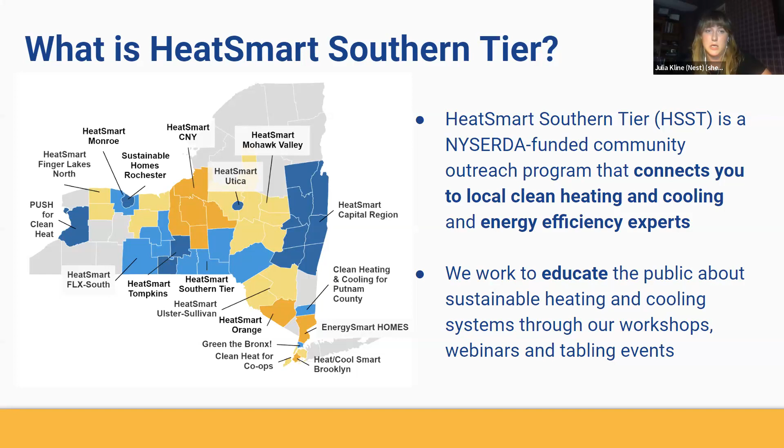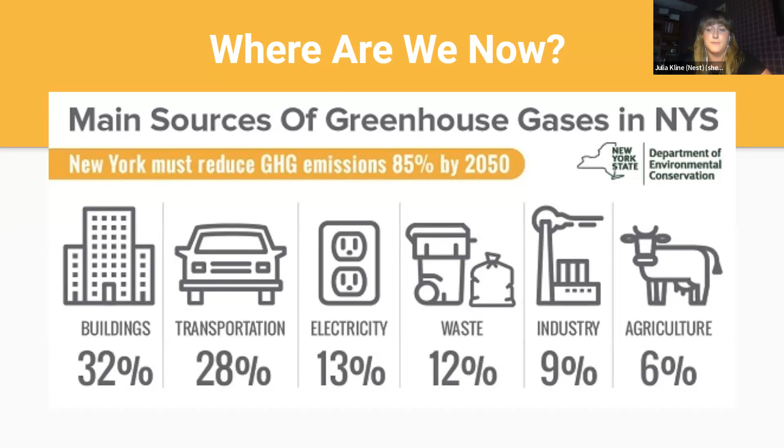So let's take a look at where we stand now in terms of greenhouse gas emissions. This diagram shows the primary source of greenhouse gas emissions in New York State. As you can see, heating and cooling buildings accounts for 32% of emissions. It's our aim to reduce this proportion by promoting and enabling people to switch off of fossil fuels and onto more efficient, clean energy technologies. Some of the biggest draws to participating in the HeatSmart Southern Tier program are the individual benefits, such as reducing your energy costs and increasing your home comfort and safety. You can also make a positive contribution to your local and broader global communities by helping reduce greenhouse gas emissions and promote more awareness about the importance of clean energy.

Here at NEST, we work with different municipalities across the Southern Tier on becoming clean energy communities. This is a program run by NYSERDA that gives incentives to municipalities who make clean energy and other sustainable improvements. Communities earn points with each action that they take, which add up to awards such as grant money. The technologies we promote mainly deal with weatherization and heat pumps. The goal of weatherization, such as insulation or air sealing, is to protect your home from the outside elements in order to maximize energy efficiency. Heat pumps are technologies that provide renewable and efficient energy that you can use for heating and cooling your home. The kinds that our program focuses on are ground source, air source, and heat pump water heaters.

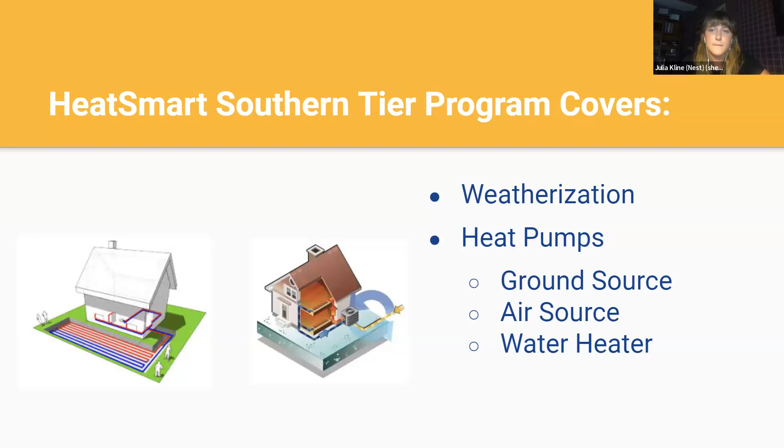All of our installers are competitively selected and NYSERDA approved. Our installer partners are here with us tonight, and we would be happy to connect you with them after the presentation if you are interested. I'm now going to pass it on over to April to talk about weatherization.

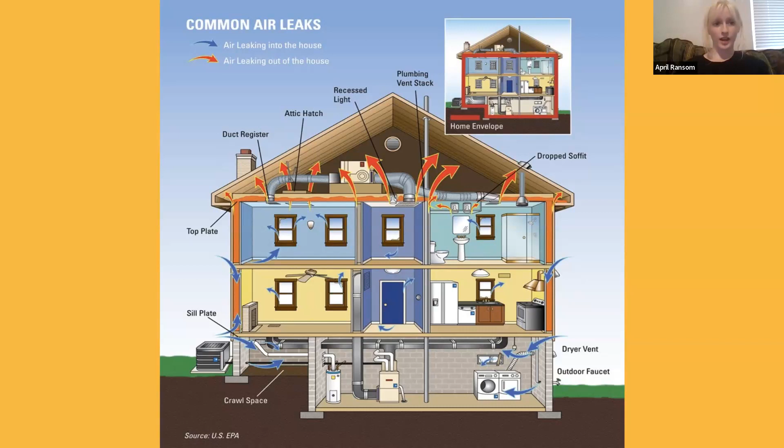There are many benefits to weatherization. This includes increasing home safety and home comfort. If your home is properly weatherized, it will help reduce drafts, improve humidity control, improve indoor air quality, and reduce the risk of ice dams. I'm sure we've all noticed the bad air quality because of the Canadian wildfires, so air quality is definitely important now. Weatherization will also help reduce energy consumption and costs.

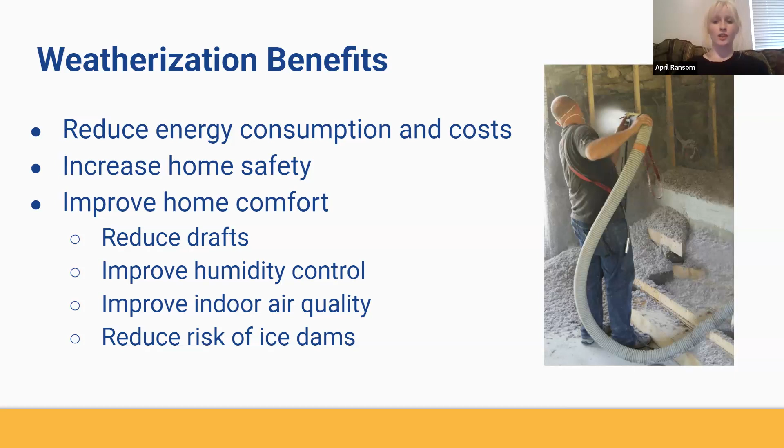With tightly sealed homes, there's a low chance that any heat will leak out of your home and that unwanted cool air will infiltrate your home. And overall, weatherization makes your home more comfortable to live in and more energy efficient. And this brings us to heat pump technologies. Heat pumps are an alternative system for heating and cooling your home. While traditional systems will use fossil fuels, heat pumps use electricity and offer a more sustainable way to heat and cool your home.

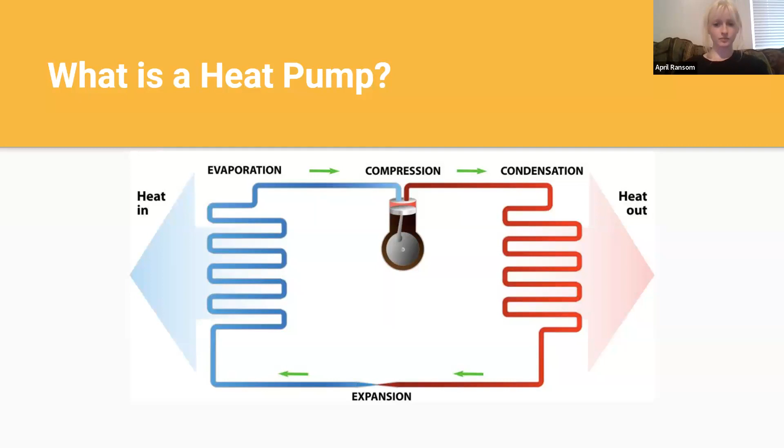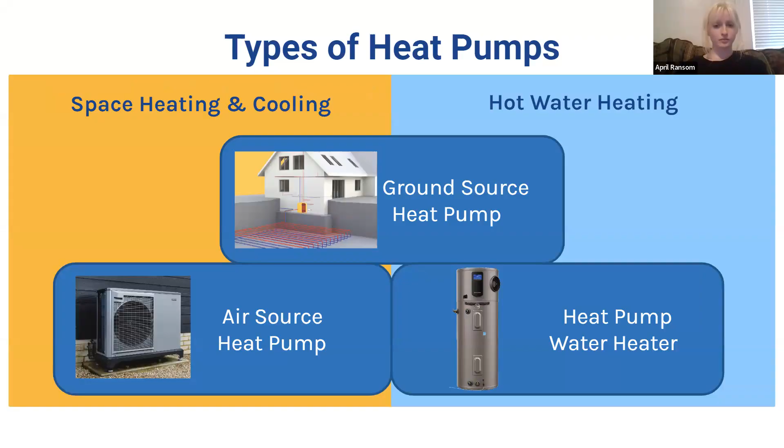So there are three types of heat pumps that we're going to be covering tonight. There's ground source, air source, and water heaters. Ground source heat pumps, as well as heat pump water heaters, can be used to heat domestic water. So the first type of heat pump that we're going to be going over is ground source. Ground source heat pumps are also known as geothermal.

About 6 feet below the ground, it's a very stable temperature, and geothermal systems circulate fluid in pipes below the ground and transfer the warm energy from the ground into this fluid. Heat is then concentrated through electricity and compression and is then circulated through your home. During warmer months, it works in reverse, transferring warm air in your home back into the ground.

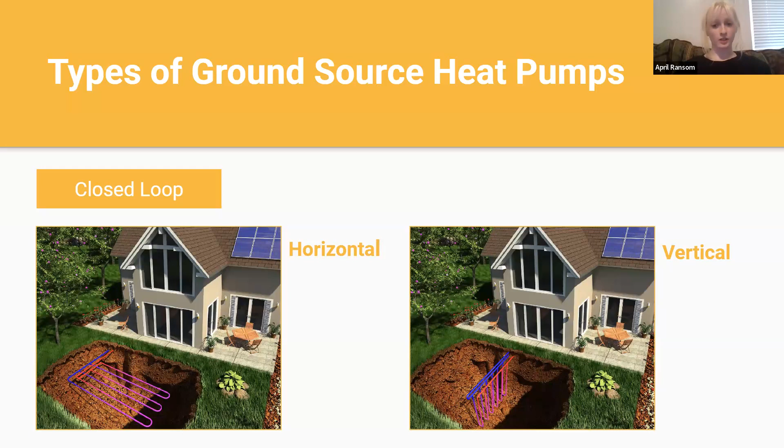As you can see, there are two types of closed loop ground source heat pumps. There are horizontal loops and vertical loops, with horizontal loops being more common as it is more affordable to install. This is because the coils are closer to the surface and it will require less digging. To know what type is best for you and your home, it is important to get an energy assessment first before trying to start any work.

So there are many benefits to ground source heat pumps, including the positive effect on the environment, your energy bill, and your home. This system is very efficient in heating and cooling your home, which means lower energy bills, and it's also long lasting. It removes fossil fuels from your home, and it can heat water in addition to heating your home.

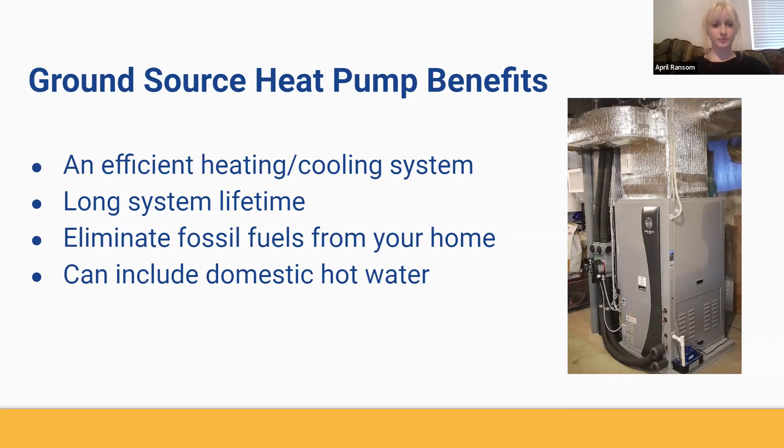The other type of heat pumps are air source heat pumps, which work similarly to ground source heat pumps, but they take heat in from the air and pump it into your home. These are typically a ductless system and do not require underground pipes like the ground source heat pump. This allows for easy and quick installation. Air source systems consist of one outdoor unit, which is linked to one or more units inside of your home.

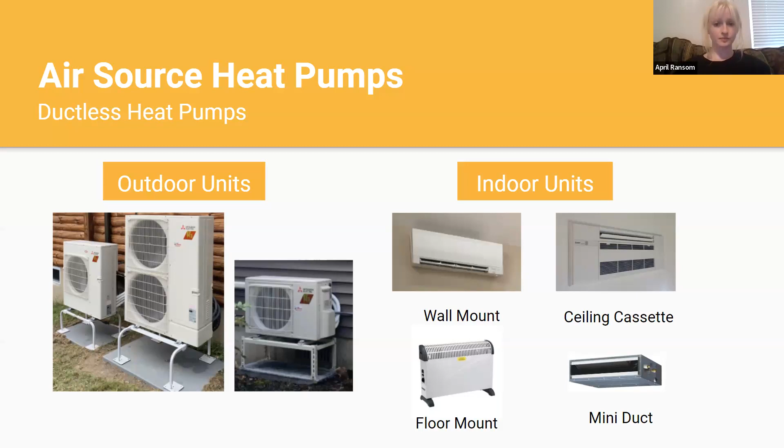These units come in various styles, as you can see here, and can fit different aesthetics and cost preferences. They operate similarly to an air conditioning unit. However, they also run in reverse to provide heat. So similar to ground source heat pumps, air source heat pumps allow for energy savings. Air source heat pumps are also very flexible because you do not have to replace your entire heating system if you don't want to. This allows for zone control in your home.

You can just get 1 or 2 heat pumps and use them for just a couple of rooms. This can allow you to have air conditioning without duct work and to maintain different temperatures in different rooms in your home. You can also get a full heating system replacement if you would like, but it's not necessary. Lastly, these heat pumps are known to be very quiet.

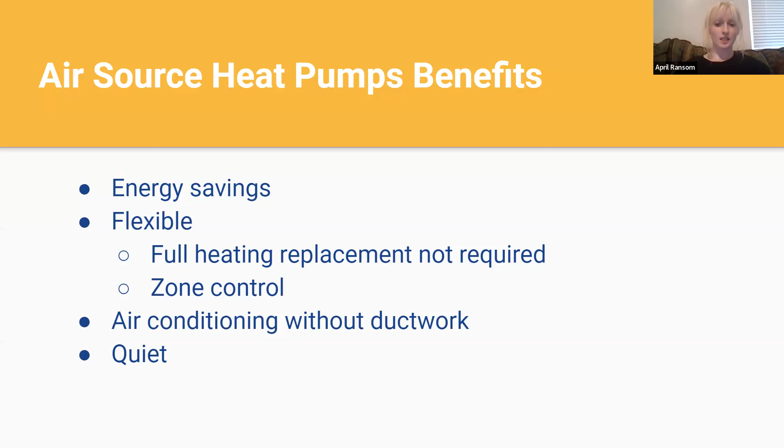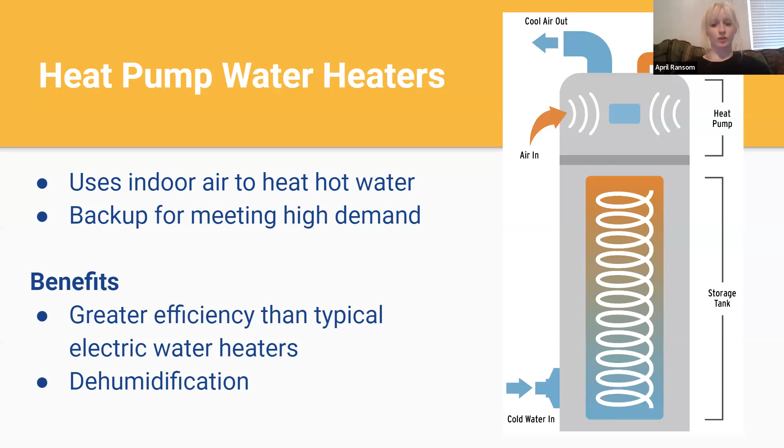The last technology we're going to cover tonight is heat pump water heaters. The heat pump technology that we've been discussing can also be used to heat water. Heat pump water heaters are basically an electric water heater with an air source heat pump on top. They use indoor air to heat the water and usually have a backup system to meet high demands. There are also many benefits to using heat pump water heaters, including greater efficiency and dehumidification for your home.

Now I'm going to pass this over to Eli to go over incentives and financing. Thank you, April. Yeah, so I'll be taking it over now and talking to you about the incentives and financing for this program.

So NYSEG and RG&E customers are offered a variety of incentives for heat pumps. This chart here shows you several rebates that exist for heat pumps. Don't worry about trying to read all the different things here. We'll be sending you a copy of the slides and a recording of this presentation so you can see it much more clearly for yourself. But I'll just take you through that. On the left, you have your different technologies. In the center, you have a description of what the rebate is. And on the right, you have eligibility requirements for the different project you're doing or what you're trying to install.

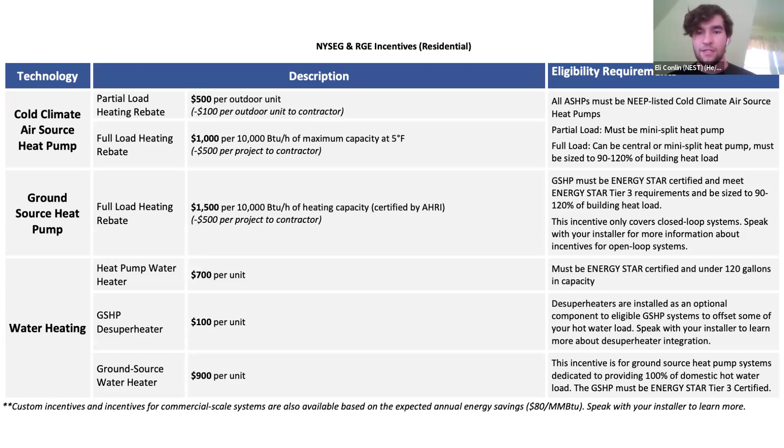For instance, if you were doing a partial installation of a heat pump, and this always varies per installation, so these numbers may be subject to change. So you should always be talking to your installer when you're going over your project, as things always vary with market supply and such. But if you're doing a partial load or a partial project for a heat pump, you can get up to $500 per outdoor unit. However, the unit would have to be up to date for NEEP standards and things like that.

In addition to these rebates, there are also several tax credits. For instance, there is a federal tax credit for your air source heat pumps, which gives you up to $2,000 per project that you're doing. If you were to do a ground source heat pump, you can get up to 30% of the material costs for this federal tax credit, as well as for heat pump water heaters, you can have up to $2,000.

There's also a state tax credit for the ground source heat pumps. That's 25% of project costs or up to $5,000. However, these numbers are subject to change with the Inflation Reduction Act. So like I said with the rebates, you always want to be in a constant flow of communication with your installers to be sure that you are up to date about what programs you can have.

In addition to these tax credits, there's also the 25C Residential Energy Efficiency Tax Credit. It's quite a mouthful, but it's also very helpful. It covers 30% of material costs for insulation, which is up to $1,200. This credit is not a lifetime credit, it's an annual credit. So if you're looking at your project and you want to do maybe your attic and your basement for 1 year, and then you wanted to revisit this project and then did your living room and your kitchen, for instance, you'd be able to break it up into chunks and get the $1,200 credit each year that you did that.

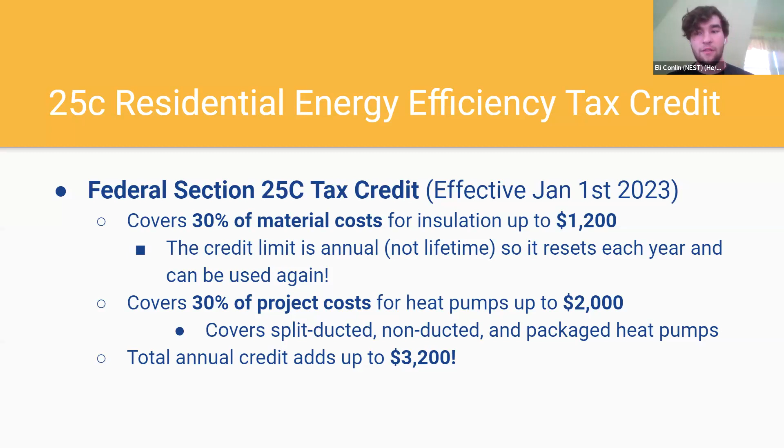So there's a couple of loan options to finance this. There are 2 loans that are offered through NYSERDA, and there used to be 3, but the 3rd loan had been taken away. And so the 2 loans that are offered by NYSERDA are the Smart Energy loans, which can be financed up to $25,000 with terms of 5, 10, and 15 years, with an interest rate of either 3.49% or 6.99%, depending on what you qualify for.

The second loan that's offered is the On-Bill Recovery loan, which has the same conditions as the Smart Energy loan. However, this loan is paid back on your utility bill over time. In addition to NYSERDA loans,

Yes, sorry, I'm in a crowded room.

So in addition to the NYSERDA loans, you can also go to the manufacturer that you're using, and that way you can get the loan. Or if you wanted to secure a loan from your local bank, you can also do that if their interest rates are also competitive.

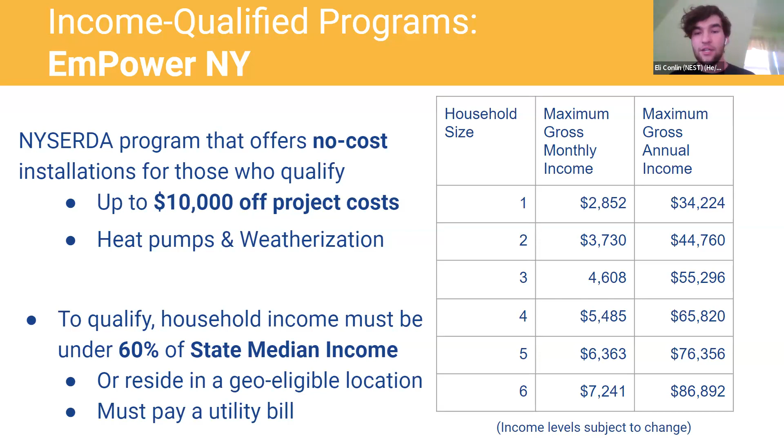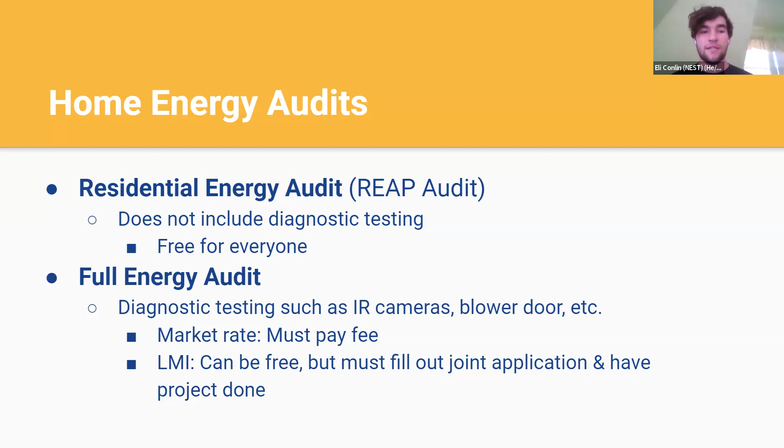Or you can get a full energy audit, which does include diagnostics, but market rate customers must pay a fee for this service. However, customers that are low to moderate income can get this service for free. However, if you're going to get it for free, you'd have to first fill out a joint application with an installer and have an energy efficiency or heat pump project already completed, so that the person that's coming and doing the audit has something to test the diagnostics against.

So if you're interested in anything that we discussed tonight, I'll take you through the general steps that you would do after this to participate in our HeatSmart Southern Tier program. First, we'd sign you up for an energy assessment through this site and have an assessment from a HeatSmart Southern Tier installer. And then you'd receive a quote for energy improvements. Afterwards, you'd apply for incentives and financing. Once you do that, you'd sign a contract for your desired systems, and then you'd have the complete installation work. We're happy to sign up anyone tonight if you wanted to start now, but remember, there's no commitment necessary.

In addition to our HeatSmart Southern Tier program, we also have our low to moderate income community shared solar for the Southern Tier project. Essentially, community solar is a subscription to a remote solar farm, which allows people access to solar energy without actually installing the panels onto your roof. This is really good if you have a lot of barriers to installing solar panels on your house. For instance, if you live in a very shady area, or maybe you've been told that your roof doesn't face the right way. If you can't afford the actual cost of installation, which can be pretty pricey, then this is a great project for you.